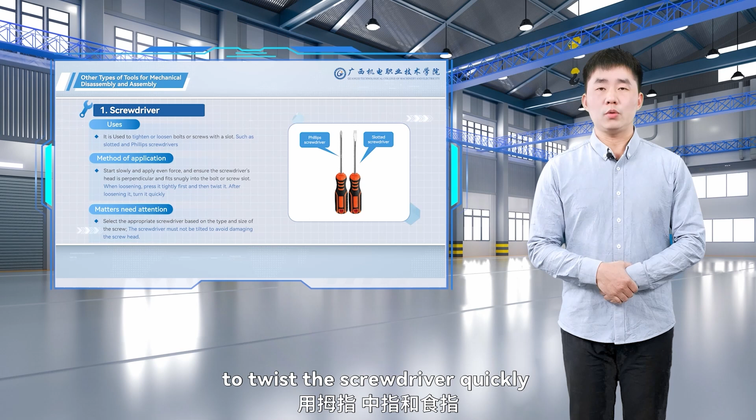After the bolt loosens, you can use light pressure to twist the screwdriver quickly with your thumb, middle finger, and index finger. Select the appropriate screwdriver based on the type and size of the screw. For example, use a slotted screwdriver for slotted screws and a Phillips screwdriver for cross screws. Never use a small screwdriver on a large screw or a large screwdriver on a small screw. When tightening screws, the screwdriver must not be tilted. It should be perpendicular to the workpiece to avoid damaging the screw head.

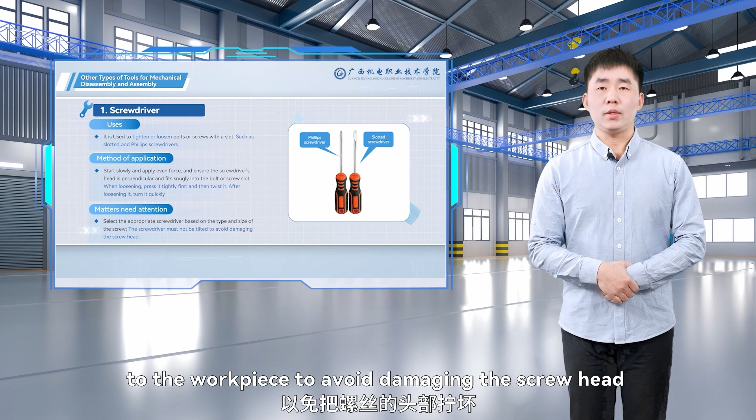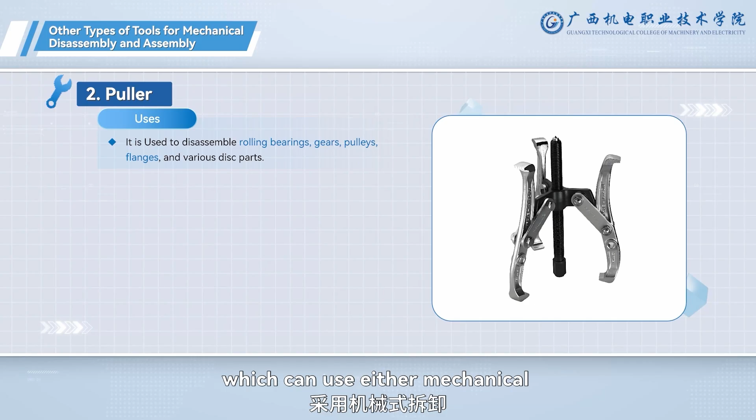The second tool is the puller, commonly used to disassemble rolling bearings, gears, pulleys, flanges, and various disc parts, as shown in the figure. Common pullers include 2-jaw or 3-jaw types, which can use either mechanical or hydraulic methods for disassembly. When using the puller to remove bearings or gears, the pull hooks act on the inner ring of the bearing. By turning the handle screw, the lower part of the screw pushes firmly against the shaft end, pulling the bearing off the shaft.

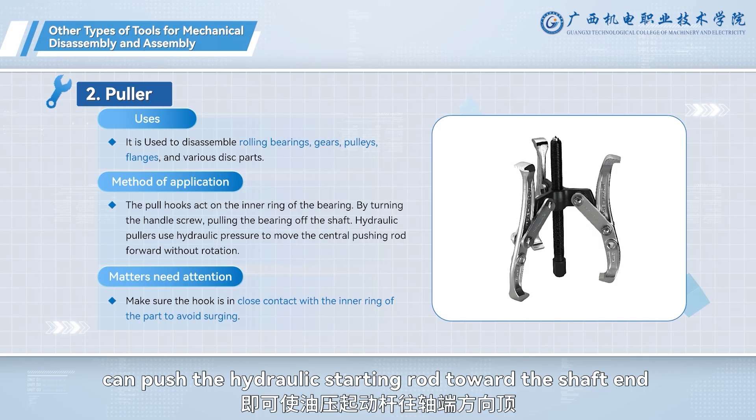Hydraulic pullers use hydraulic pressure to move the central pushing rod forward without rotation. The hook seat can move forward or backward with the threads to adjust the distance. A small swing of the operating handle can push the hydraulic starting rod toward the shaft end, causing the hook claws to retreat and pull out the bearing.

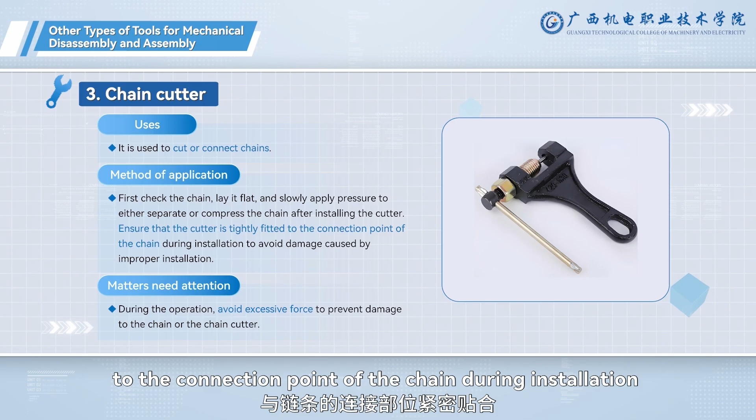The third tool is the chain cutter, used to cut or connect chains. When using a chain cutter, first check the chain, lay it flat, and slowly apply pressure to either separate or compress the chain after installing the cutter. Ensure that the cutter is tightly fitted to the connection point of the chain during installation to avoid damage caused by improper installation.

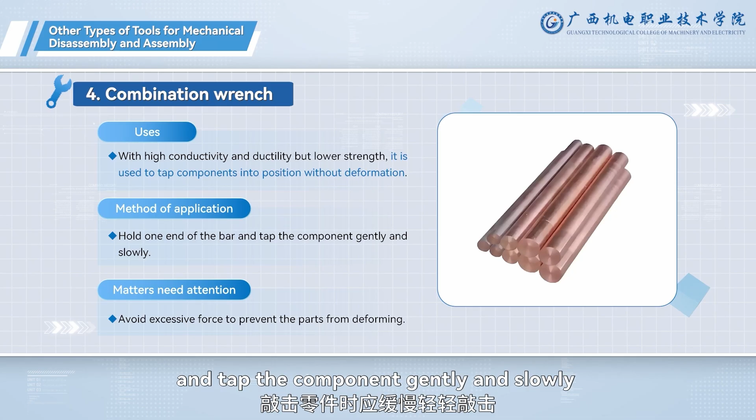The fourth tool is the copper bar. With high conductivity and ductility but lower strength, it is used to tap components into position without deformation during assembly. Hold one end of the bar and tap the component gently and slowly.

The fifth tool is the hammer, a striking tool categorized into metal and non-metal types. Common metal hammers include steel and copper. Non-metal types include plastic, rubber, and wooden mallets. Rubber hammers can prevent deformation of workpieces during striking. For precision workpieces or hardened surfaces, use softer hammers to avoid damaging the workpiece surface.

Before using a hammer, carefully check that the hammerhead and handle are securely connected to prevent accidents from the hammerhead coming loose during use. If the hammerhead has burrs on the edges, they should be ground off to prevent injury in case of breakage. When using a hammer, choose the appropriate material, size, and shape based on the nature of the work.

The sixth tool is wire cutters, a tool used for gripping and cutting. Wire cutters consist of the jaws and handles.

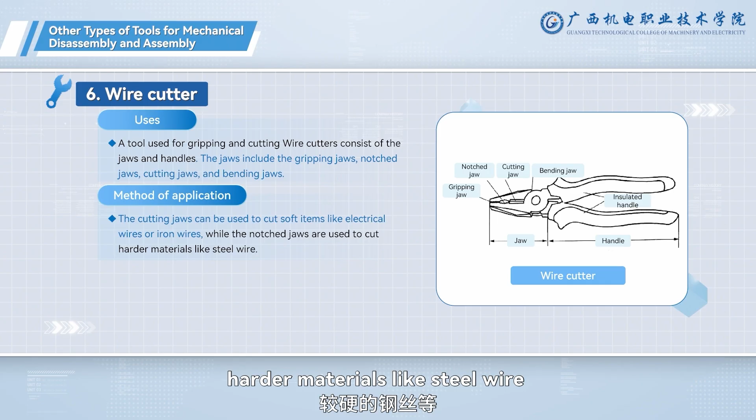The jaws include the gripping jaws, notched jaws, cutting jaws, and bending jaws. The cutting jaws can be used to cut soft items like electrical wires or iron wires, while the notched jaws are used to cut harder materials like steel wire. Do not use wire cutters as a wrench or substitute them for a hammer to strike other workpieces. They should not be used to pull nails either.

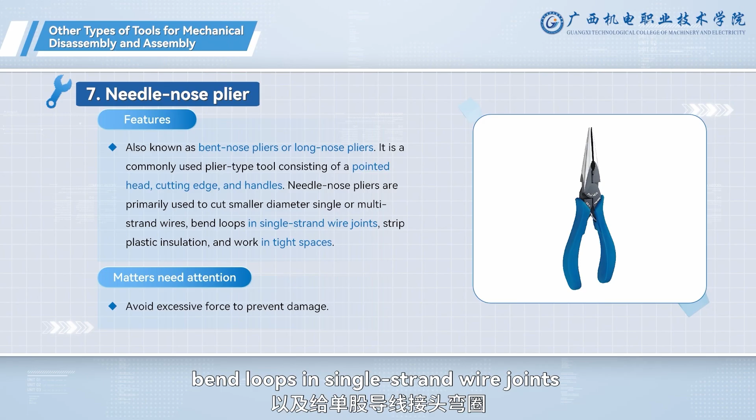The seventh tool is needle nose pliers, also known as bent nose pliers or long nose pliers. It is a commonly used plier type tool consisting of a pointed head, cutting edge, and handles. Needle nose pliers are primarily used to cut smaller diameter single or multi-strand wires, bend loops in single-strand wire joints, strip plastic insulation, and work in tight spaces.

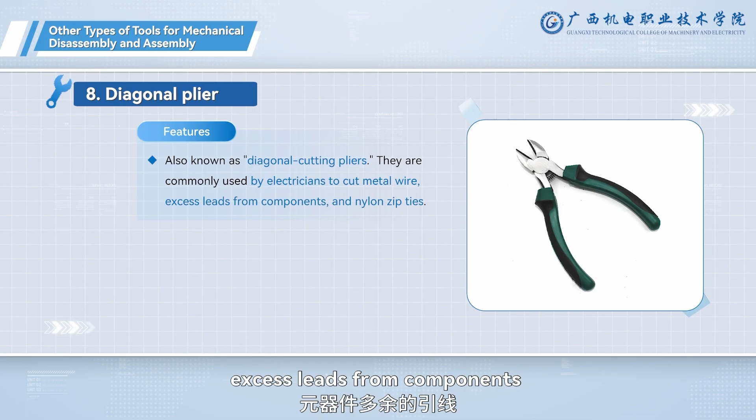The eighth tool is diagonal pliers, also known as diagonal cutting pliers. They are commonly used by electricians to cut metal wire, excess leads from components, and nylon zip ties, but should not be used as a substitute for regular scissors to cut insulation sleeves.

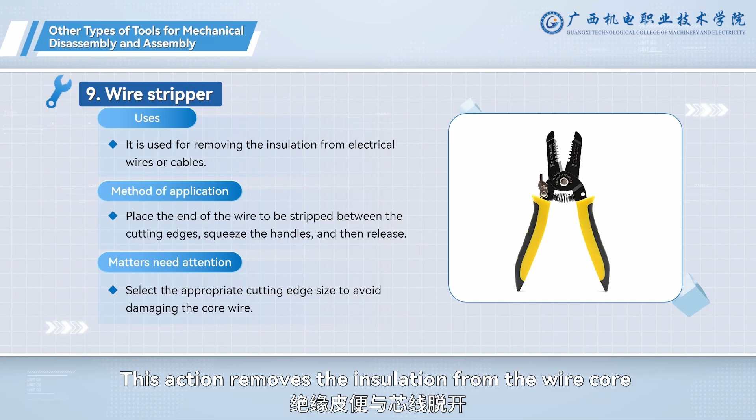The ninth tool is a wire stripper, which consists of a cutting edge, wire compression opening, and handles. The handles are covered with an insulated sheath rated for 500 volts working voltage. Wire strippers are used for removing the plastic or rubber insulation from electrical wires or cables. To use, place the end of the wire to be stripped between the cutting edges, squeeze the handles, and then release. This action removes the insulation from the wire core.

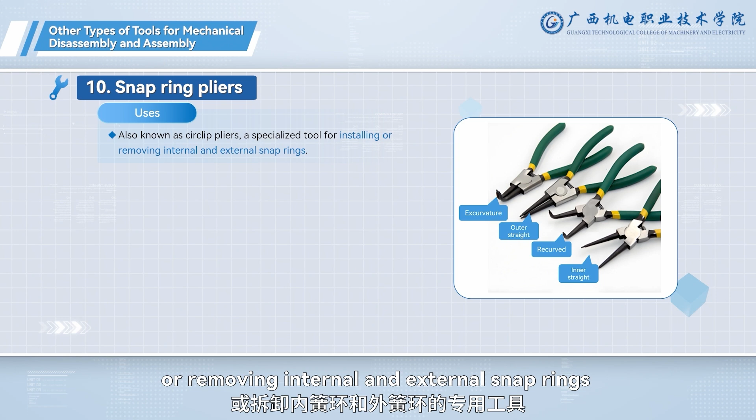The 10th tool is snap ring pliers, also known as circlip pliers, a specialized tool for installing or removing internal and external snap rings. To remove an external snap ring, use the shaft snap ring pliers, which are normally closed, but when in use, grasp the handles to open the jaws and pull the ring off the shaft.

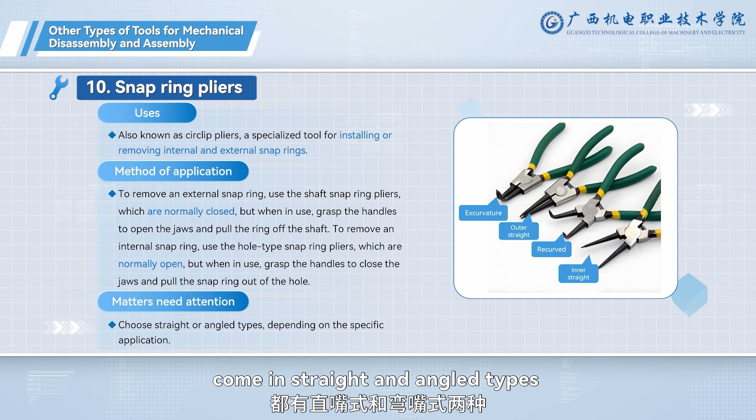To remove an internal snap ring, use the hole-type snap ring pliers, which are normally open, but when in use, grasp the handles to close the jaws and pull the snap ring out of the hole. Both shaft and hole snap ring pliers come in straight and angled types, depending on the specific application.

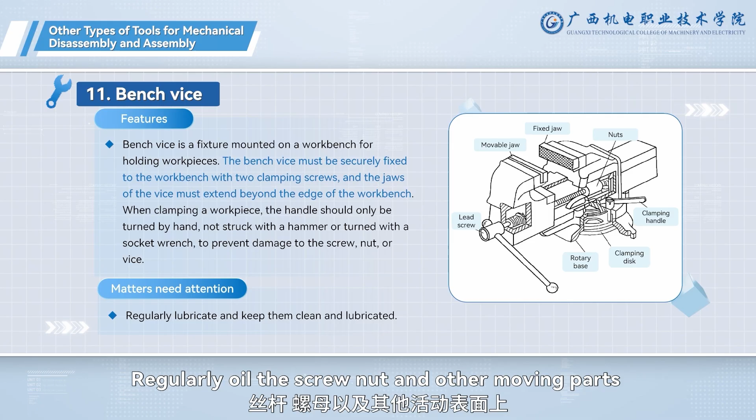The 11th tool is a bench vise, a fixture mounted on a workbench for holding workpieces. The bench vise must be securely fixed to the workbench with 2 clamping screws, and the jaws of the vise must extend beyond the edge of the workbench. When clamping a workpiece, the handle should only be turned by hand, not struck with a hammer or turned with a socket wrench, to prevent damage to the screw, nut, or vise. Regularly oil the screw, nut, and other moving parts to keep them clean and lubricated.

The 12th tool is pipe pliers, used to grip, tighten, or remove various pipes, pipe fittings, or round parts. They are commonly used in pipe installation and repair. The body of the pipe pliers can be forged or made of aluminum alloy, which makes them lightweight, easy to use, and resistant to rust. Choose different sizes of pipe pliers based on the diameter of the pipes you are working with.

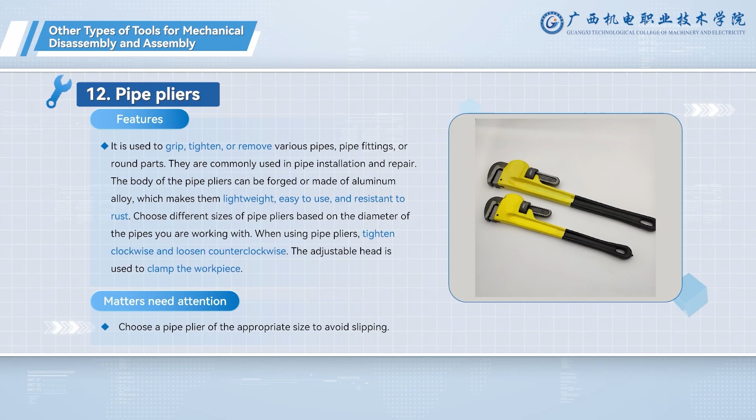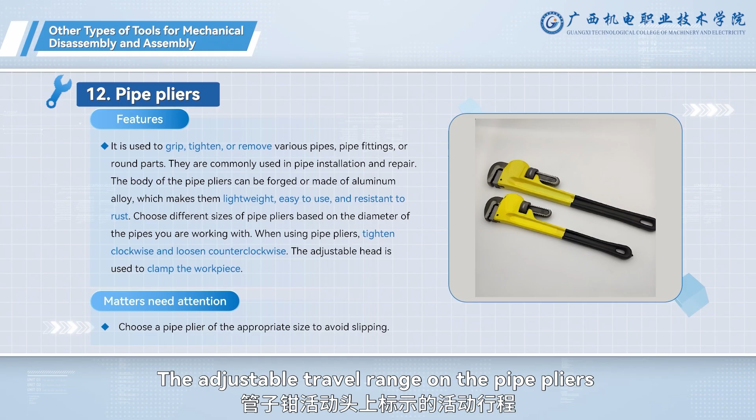When using pipe pliers, tighten clockwise and loosen counterclockwise. The adjustable head is used to clamp the workpiece, and failure to follow the correct direction may cause slippage and even injury to the operator. The adjustable travel range on the pipe pliers indicates its working range.